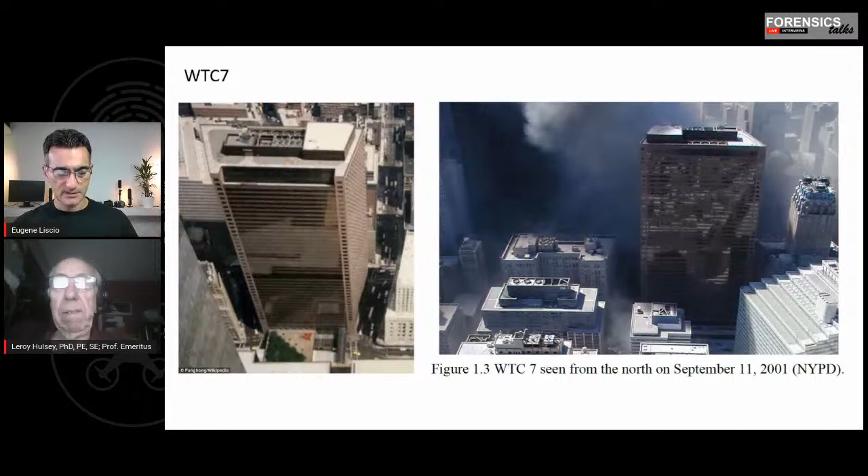I normally try to keep this conversational, but because of the content and the type of thing we're dealing with, it's very difficult to talk about all the components without giving some visuals. So let me go through this very quickly, and if I'm incorrect in anything, please correct me.

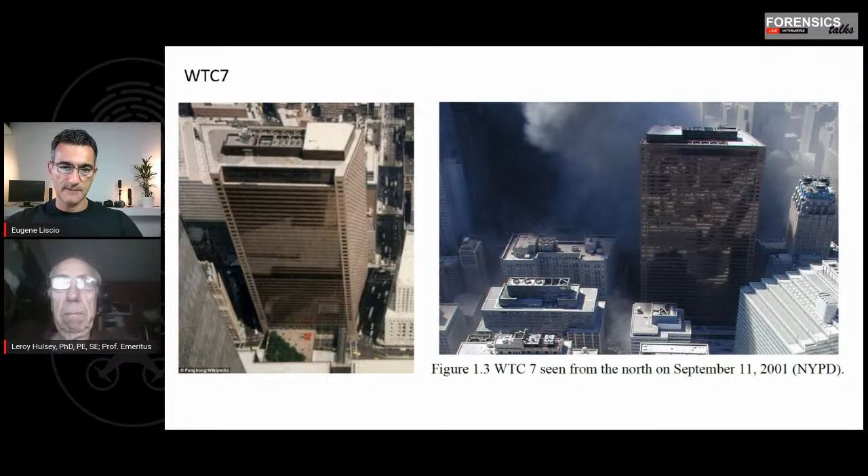World Trade Center 7 was a 47-story building completed in 1987. It was steel frame with reinforced concrete floor construction, built above the Consolidated Edison of New York Electric Power Substation, with its first 3 floors connected to the substation. Inside this ellipse here is where we have the original substation.

World Trade Center 7 is located about 105 meters north of World Trade Center 1. If you see my mouse, that's World Trade Center 7 there, and down here we have World Trade Center 1 and then World Trade Center 2. So World Trade Center 1 is actually the closer of the two tall buildings.

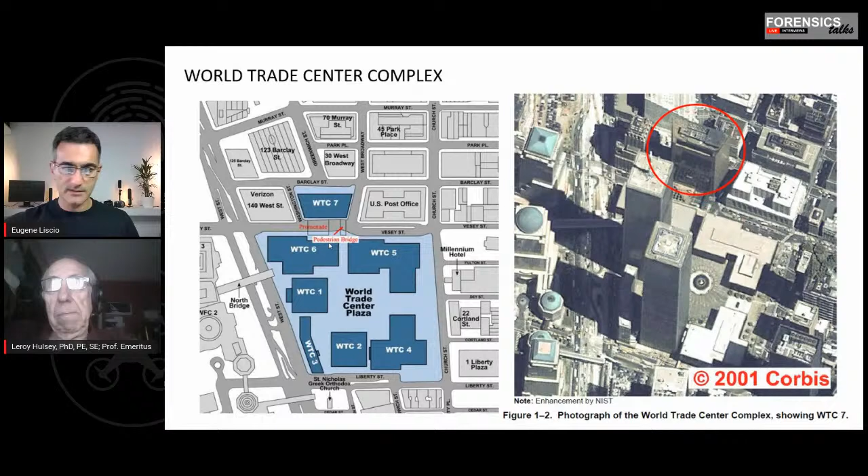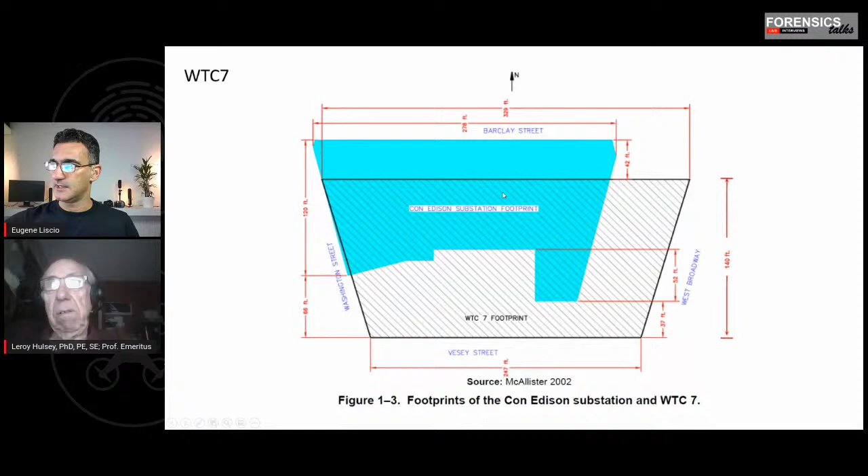Now World Trade Center 7 is not a symmetrical structure, so you can see it looks sort of like a trapezoid. If we look at a plan view here, you'll see one end, the north end, is wider than the south end. The north end is about 100 meters, and the south end is about 75. Shaded here is the outline of the Con Edison substation.

In terms of the timeline of events for that day: at 8:46, American Airlines Flight 11 crashes into the North Tower of the World Trade Center, hitting between the 93rd and 99th floors, killing all 92 people aboard. Then just after 9 a.m., United Airlines Flight 175 crashes into the South Tower between the 77th and 85th floors, killing about 65 people aboard.

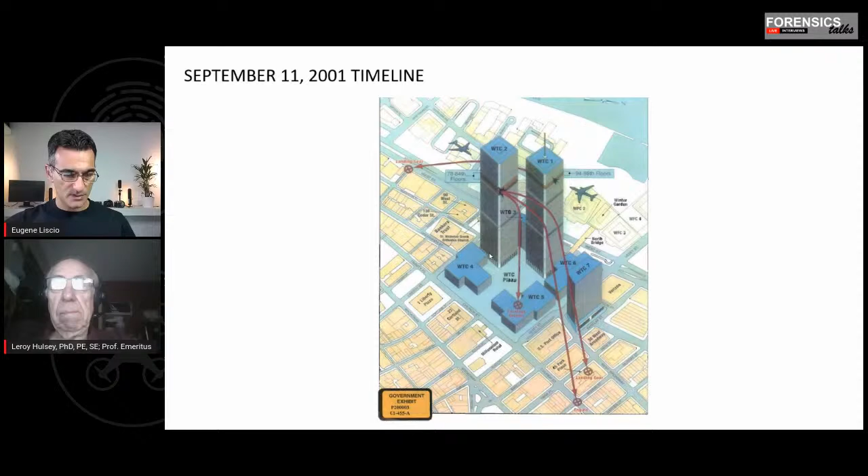At about 9:59, just before 10 a.m., the South Tower collapses. At 10:28, the North Tower collapses. The North Tower is the one that contributes to the damage of World Trade Center 7 — it's substantially damaged by debris when the North Tower collapsed, and the story is that the debris ignited fires.

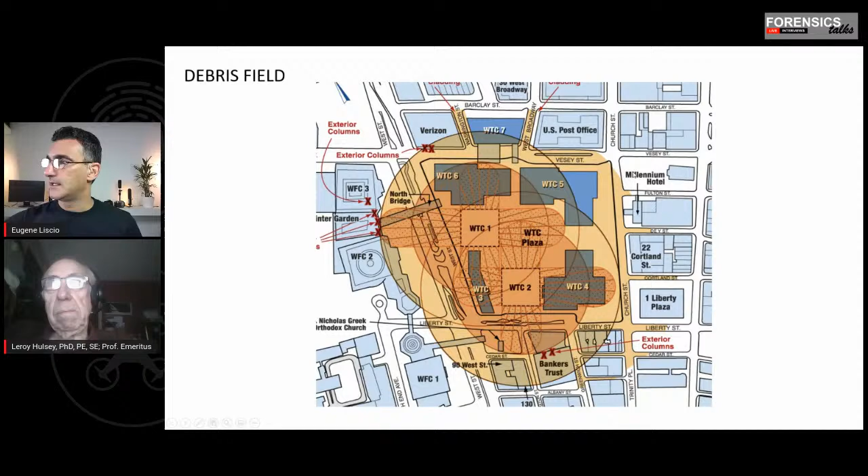What you're looking at here is a debris field outline, the largest circles being the extent to which much of the material was found. Right after this, you can see some of the damage that was mapped out — the red areas are really what we're looking at.

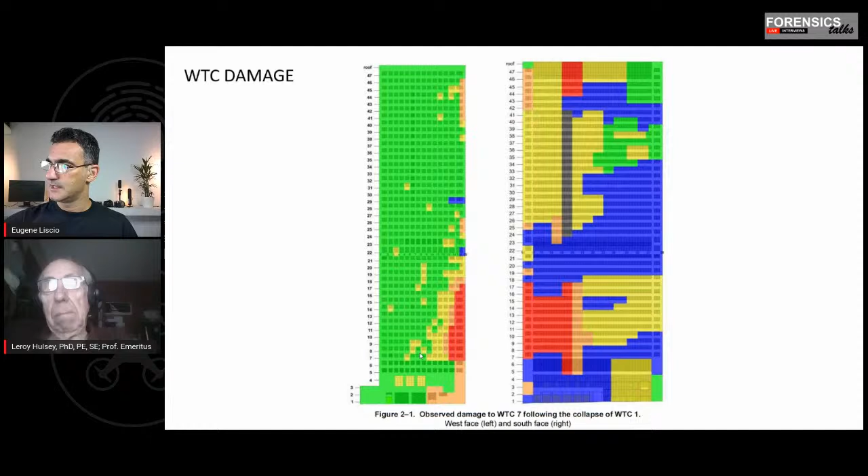The view on my right is the south face, the face closest to the North Tower. The small red section here is a view on the west side, and this corner is the southwest portion.

The building from the 7th floor to the 47th floor was supported by 24 interior columns and 58 perimeter columns. This was a building that had sprayed fire-resistant material, so it wasn't just a completely empty steel structure — there was obviously some protection. Now, as the story goes, the sprinkler system wasn't working.

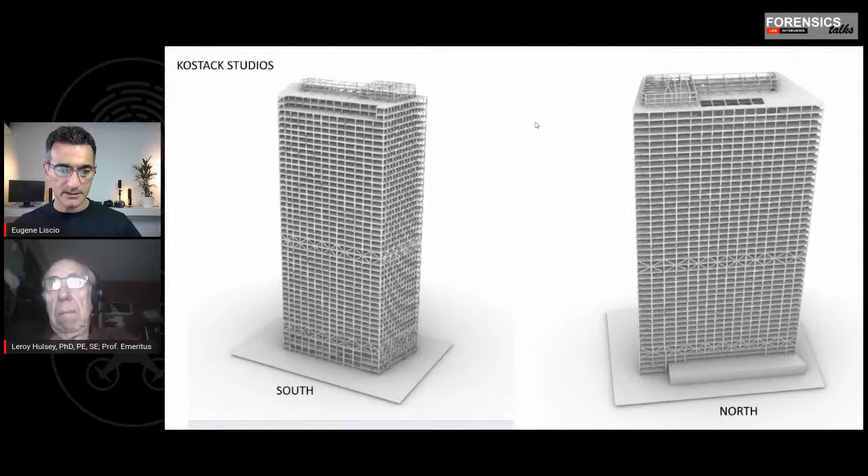In this building, you could see in the video before that there was some fire or smoke, but not what I'd call a substantial amount — the back end of the building was pretty much intact. But later in the day, I believe around 5 p.m. or so, the tower goes down. So that's kind of where we're at, and I'm sorry I'm going quickly here, but we have to focus in on some of the details of the report.

There were a number of different reports, and the basic story goes that the fires caused some expansion of these beams. This particular column here, column 79, is of particular importance — this is the critical beam that everybody has been really focusing on.

And the top end of my screen is the north end, so it's this northeast corner that's important. There's a number of beams that go across and attach to a girder, which attaches to column 79.

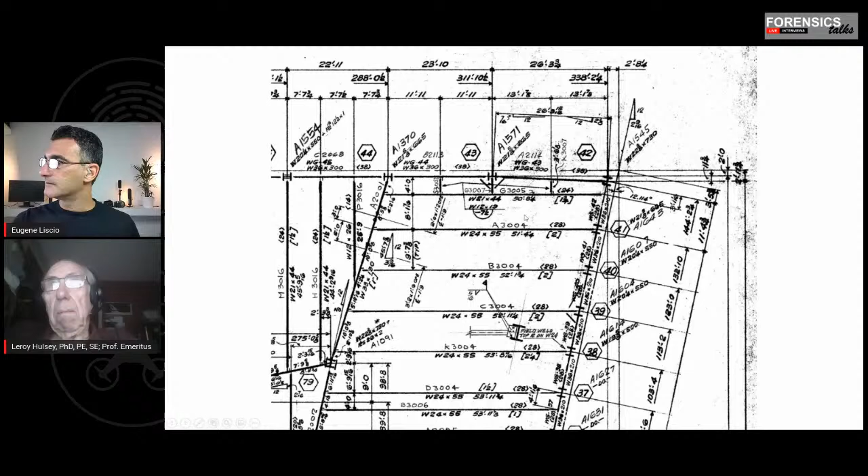And we have some design drawings and that sort of things. This is a schematic that I took out of Dr. Hulsey's report, and you can see here that there's some structure. So this column right here is 79, and then we have some beams and that sort of thing.

Okay, so I'm gonna stop there, and I have a question for you, Dr. Hulsey. First things first, the design of this particular building. When using a steel frame or a steel structure, what is the benefit, or why do you use a steel frame versus just building with concrete or whatever? What's the benefit?

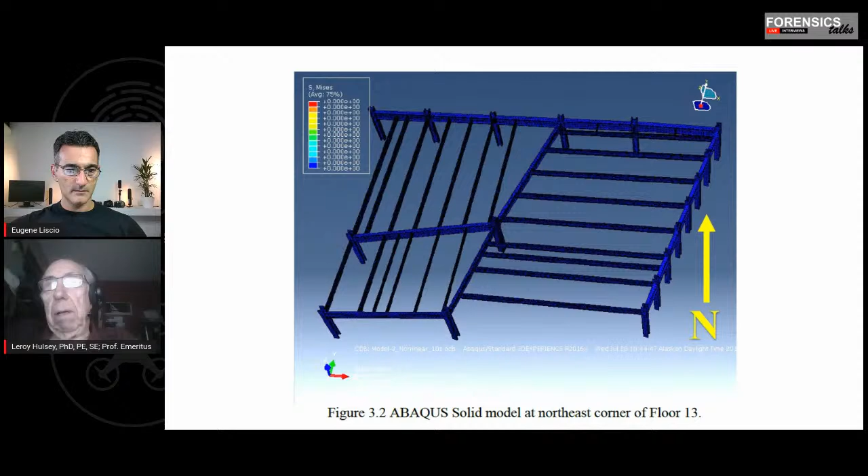Well, I think it's more about economics. Over the years, the concrete has been a preferential material over steel, and then a few years later, the steel industry gets more competitive, and then they become the preferential material to build buildings by. So you can even see a building start up architecturally as one kind of building and get changed before it gets to the construction stage, simply for those reasons. So there's a number of, and then there's preferences by people on what they would like to have and how they could make it work.

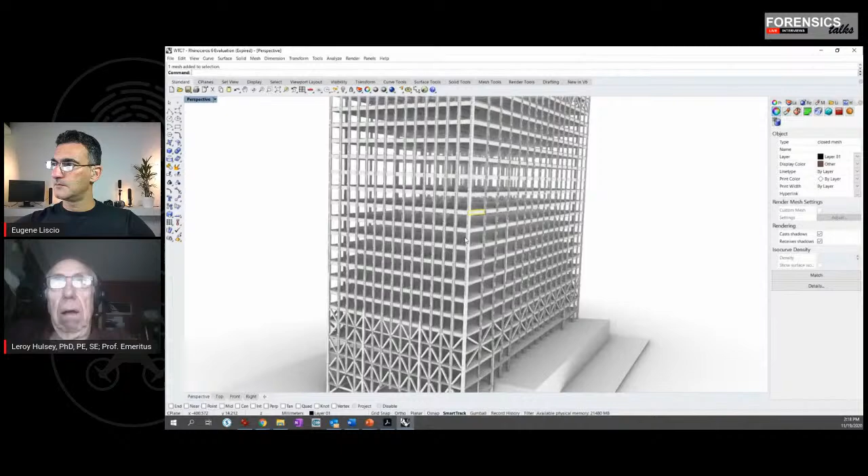Such as a concrete building can be architecturally very friendly, whereas a steel building has limitations. You've got an awful lot of, shall we say, a frame. You got a lot of shop work to do to get a shape that's other than straight, and so there's disadvantages if you want to go to highly irregular curvature kind of conditions to go steel. But something like this, where it's all straight sections for the most part, is probably a good choice to go steel.

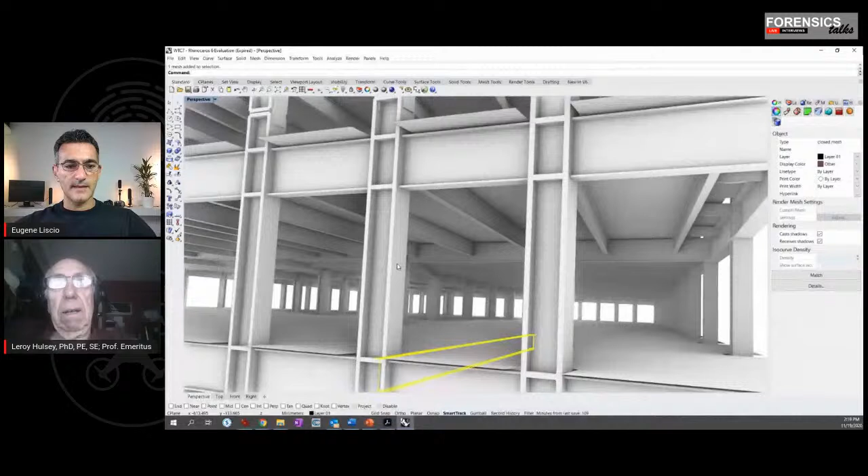I mean, is there anything here that raises any flags in your mind that says, hey, there's something designed poorly or something? I mean, it's built. They say it's built to code. I mean, the fact that it's an irregular shape, it's not rectangular, does that cause any concern?

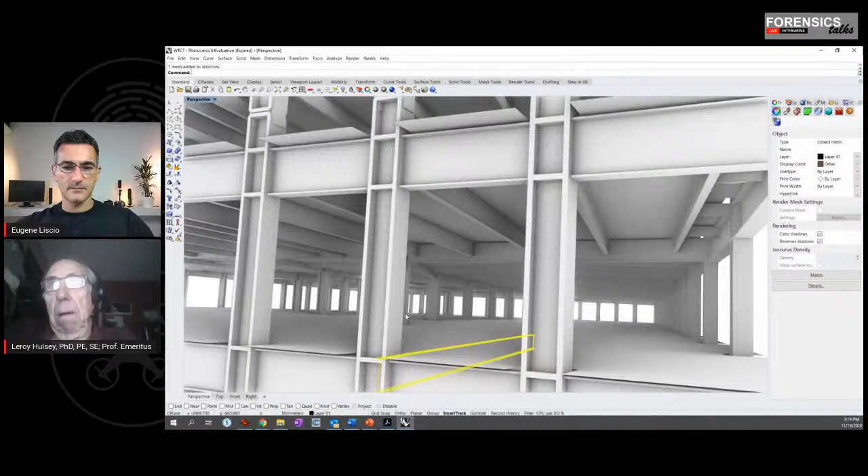Well, it causes complexity and load distribution. It tends to be. I felt like the design of this building was not the most desirable. I thought there was a lot of complexities in it that I didn't think it needed to be there. But in terms of code, I did not see anything in this building that flagged a code violation or flagged a situation that would make it be questionable in that regard.

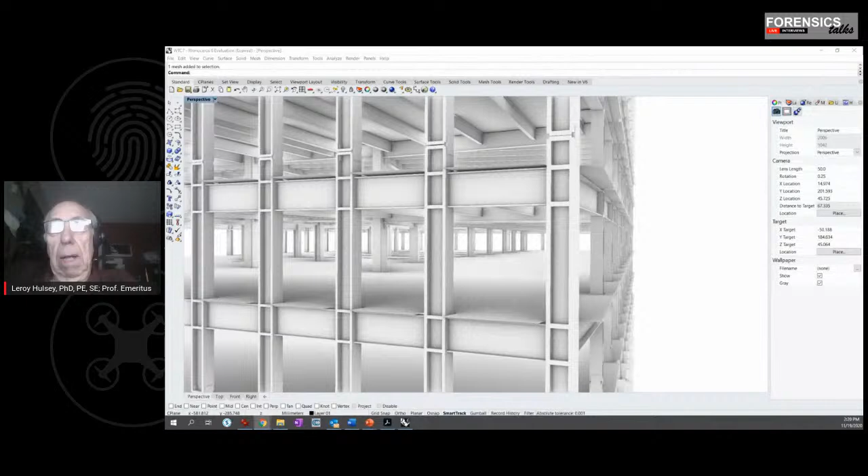Okay. So I don't know, do I have a minute just to share something with you? I would like to say that when I started this, I announced right away that fire did not bring this building down. And the first thing I looked at, I didn't look at what NIST did. I looked at how that building needed to behave. And it became very obvious very quickly that it was not what was being said. And so I put that out there, and that was before the end of the first year.

And then the other 3 years I was working on trying to figure out, trying to simulate NIST assumptions and seeing what they came up with, and then trying to evaluate the actual collapse, which was not an easy task. So anyway, that's kind of what I wanted to just share with you quickly.

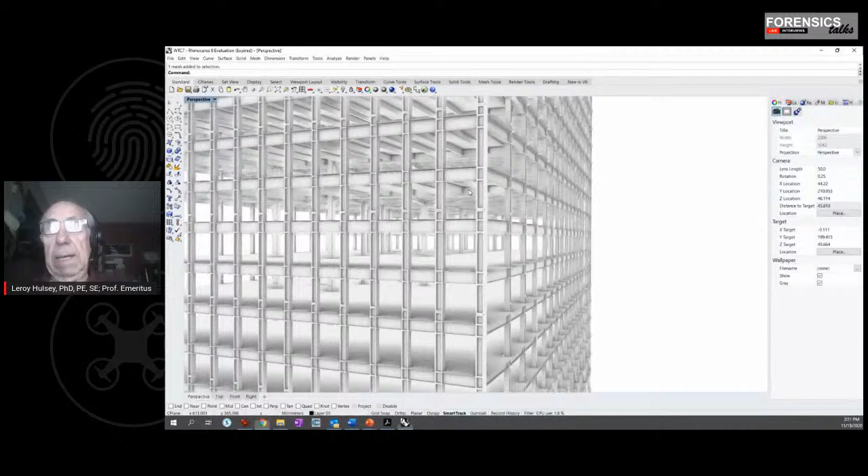The connections on this schematic is not actually what was used to build this structure with. I mean, geometrically, it's a good view.

Anyway, are you still there? Yeah, I'm here. I'm just listening.

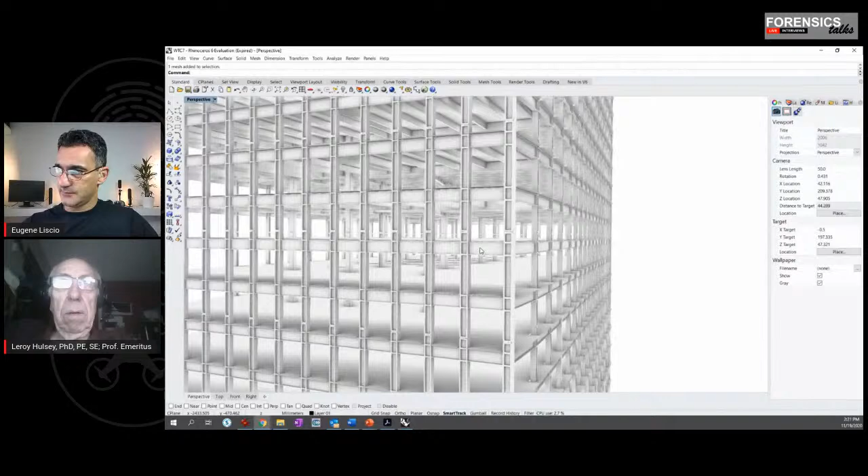What I'd like to do is just show people, we got to get people's head around this thing. What we're talking about is the corner here. This is the northeast corner, and then if we get inside, you'll see that there's a number of beams here, and so it's this column right here. So this would be column 79 that'd be failing, and the connection here is not correct.

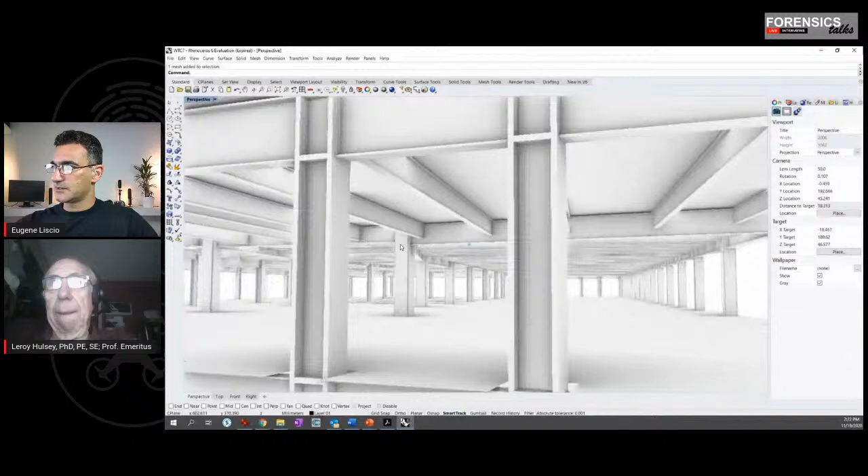This is just a model for visualization, or something that's demonstrative, so it's not fully accurate. But that particular connection looks more like this.

So Dr. Hulsey, can you tell me about the seated top clip connection? Yeah, if you take a look at the picture on your left, you'll see two things that are significant. The column, it looks like an H looking down on the top. And what they did is they came in and they put plates on and welded it to the outstanding legs on each side.

So, and those legs actually stood out from the edge of that H. And then they connected the A2001 girder, which is what if you'd bring your arrow down, that's it.

And you'll notice that there are stiffeners, web stiffeners right next to the edge. That's it right there. That web stiffener is significant because it stiffens that web and it stiffens the flange down at the bottom. You notice that stiffener is not all the way up. It's only at the bottom where that A2001 is actually sitting on a base plate.

And if thermally, what NIST said is that when this thing heated up, that the A2001 slid along the base plate and slid off of that support.

Well, first of all, they forgot to include the stiffener. That wasn't part of their analysis. Secondly, that outstanding leg sitting out there, it could not go past that anyway. In other words, to your left, right there, it sticks out past that flange, and so therefore it couldn't move any further. So if everything I did was wrong, it still couldn't have moved past that, and it wouldn't have fallen.

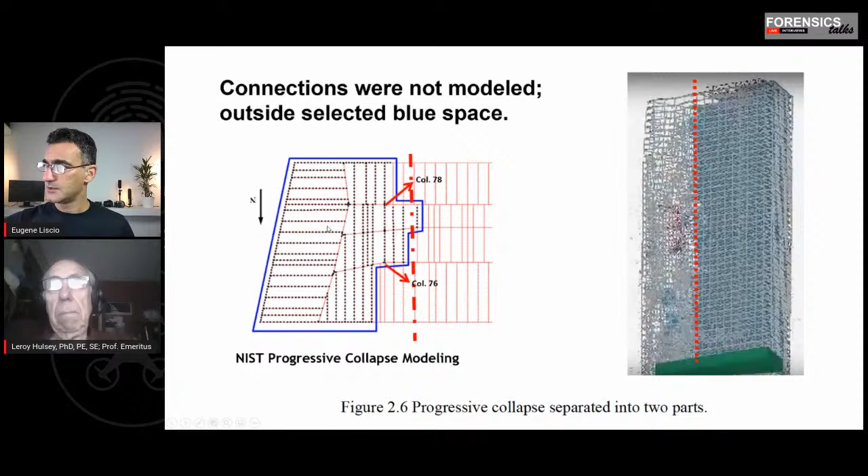What about the type of modeling that was used by NIST? So, for example, I saw that you had a very extensive model. Let me see if I got it here. So this here, what I have on my screen is the model that was produced by you and your team. What can you tell me about this model in terms of its accuracy?

I would say it's extremely accurate because what we did is we initially modeled it and we used what's called a coarse mesh, and then we kept refining the mesh. And when you don't see any changes to your results, or minimal changes to your results, you're converging in on a solution that you're looking for, and that's what I did.

Okay, and so if you'll notice, that green, that's just not a solid. That's a whole bunch of little pieces put together to create that shape. And so when we did all of that, we were getting really, really very, very good results in what we were looking for.

Okay, in terms of, I mean, you had mentioned fires and the fact that NIST is saying that there were fires on the building, and you can sort of read in the reports the progression of fires. They actually, and it appears that the south side is the part that actually gets struck, but the fires progress both clockwise and counterclockwise around the building over time. And it's interesting that it's the northeast corner that actually is the part that is that they're saying had failed first.

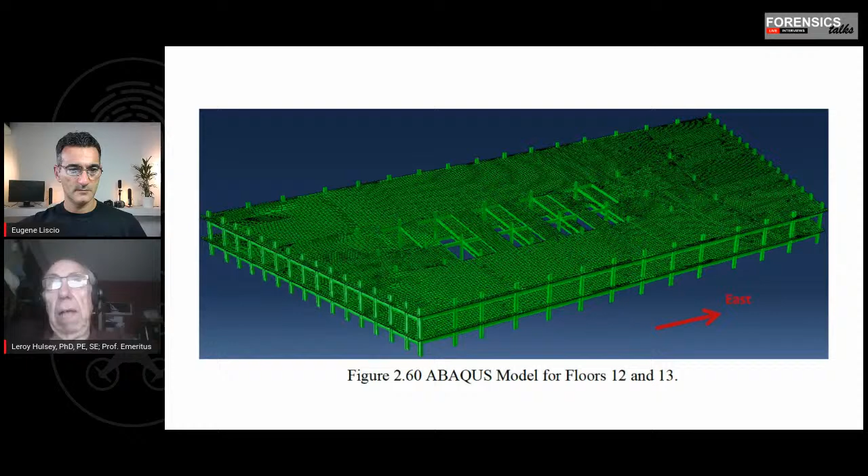When it starts going to larger temperatures, then you start getting a degradation of its capability to carry load and its capability to deform properly. So essentially we have a curve in our report that shows how it degrades with temperature, and so in this case, there were fires spread around, but the question I asked from day one is where was the fire combustibles at?

What produced it? Because most of these were financial operations or governmental operations, and they would have had everything in safes. I don't understand where all the fire combustibles were coming from, other than coming in from the building that fell down, the other World Trade Center buildings.

Right, so it's an interesting question. So these are just office fires, or whatever you have - people might have a printer, a desk, chairs, whatever other materials you're working on. That sure would be the source of what's burning.

So I guess the question is, in your models, did you use the retardant material, or did NIST use it, or is it not used? I did not use it.

And that's conservative because I wanted to see if we had the fire going in there, what conditions did we have to worry about.

On the floor, it's a concrete floor connected to these steel beams and girders, and of course NIST didn't account for the fact that there were shear connectors on it, but there actually were. So that made it stronger than they would have thought otherwise. But underneath that, it was a drop down ceiling, and that was a cavity.

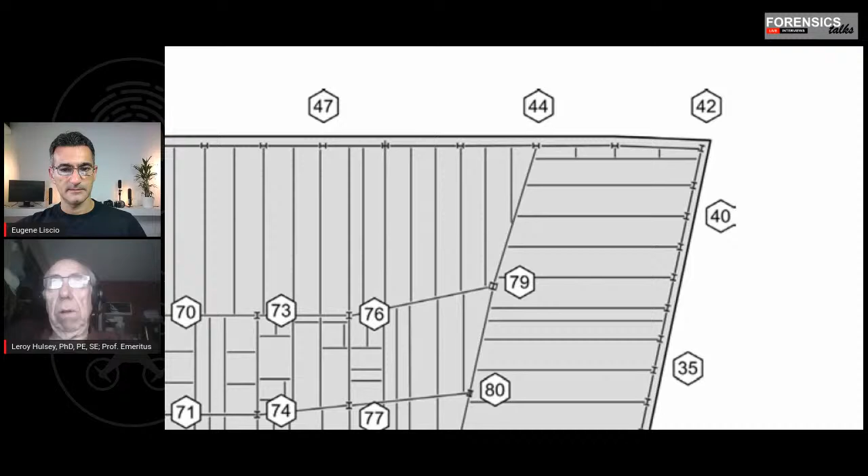Well, keep in mind that NIST looked at the exterior of the building to be fixed - in other words, couldn't move. And if you put your pointer up to number 40 on the exterior, that kind of gives you an idea of the east side, northeast side of this thing.

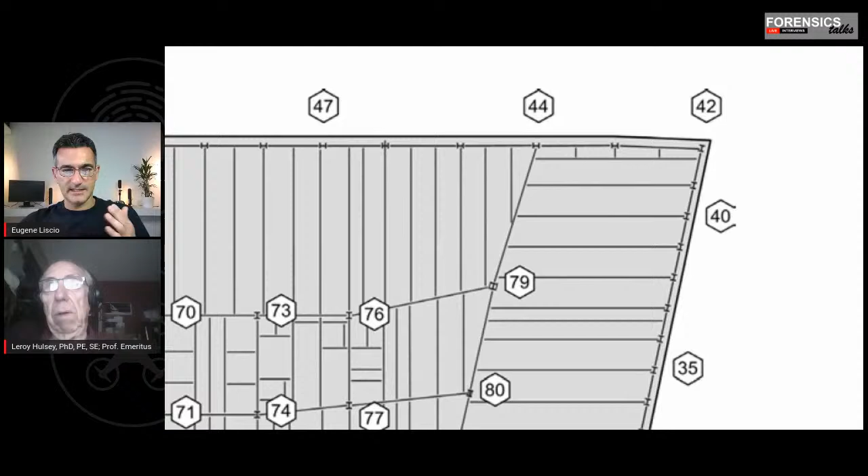And if it starts expanding, it's going to start moving with respect to that line 35-40, and all the movement then moves towards 79 and 44. So the assumption they're making, this boundary condition, is that the outside wall is not going to move, even though there's nothing on the other side to hold it back. Correct - they're suggesting that it's fixed rigidly and that everything is going to move to the west in our case.

That being said, there are beams through there, like at 79, but to the right of it - going from 79 over to the line 35-40, there's a beam going from column 79 left to right. You go upward, you get another one left to right, up another one left to right, and then at the very top near 44-42, you got one going from left to right, but there's members that are crossing, coming down and fastening to it to give it buckling resistance, and it's framed into the exterior wall system.

Okay, so all of those heated up. And that one up there buckled per NIST, but if they put those little beams in there, which they didn't, it wasn't going to buckle. And so all of that stuff affected what was going to happen on girder A2001, which was framing from 79 to 44.

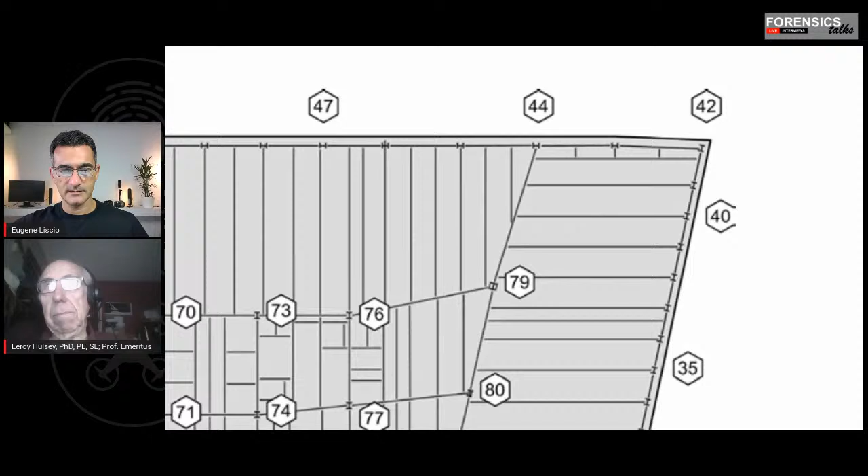Now, did NIST assume that there was no fire retardant material as well? I'm pretty sure that that's the case - I'd have to go back and review that again. But we did look at it the same way that they did.

I wanted to give it the benefit of the doubt so that there would not be any questions about whether we may have biased it. The only thing you can do in a case like this is look at the maximum and the minimum, and see where you are within it - you want to make sure that you haven't described something that's not even remotely possible.

Well, I guess my question was going to be: is there some kind of reason for fixing the outer wall, a beam? I have no idea. It's not fixed - no, it's not, it's flexible. Yeah, well, that makes sense to me.

So the very first thing, less than a year in, I said, wait a minute, this thing is actually not moving to the west - it's moving to the east.

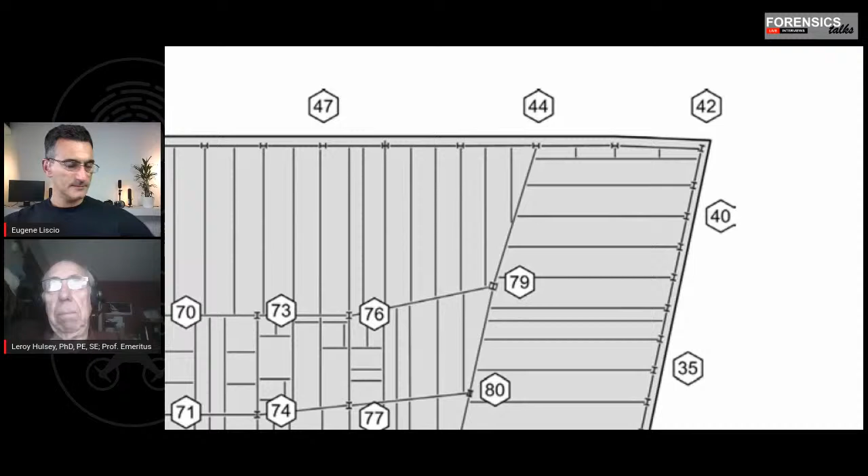So interesting, if you really stop and look at the thermal expansion of this floor system, the stiffest area within that floor system thermally is near the elevator shafts. So the movement, if you heat up this floor, it's going to be somewhere near those elevator shafts, and it's going to move in all directions with respect to that point.

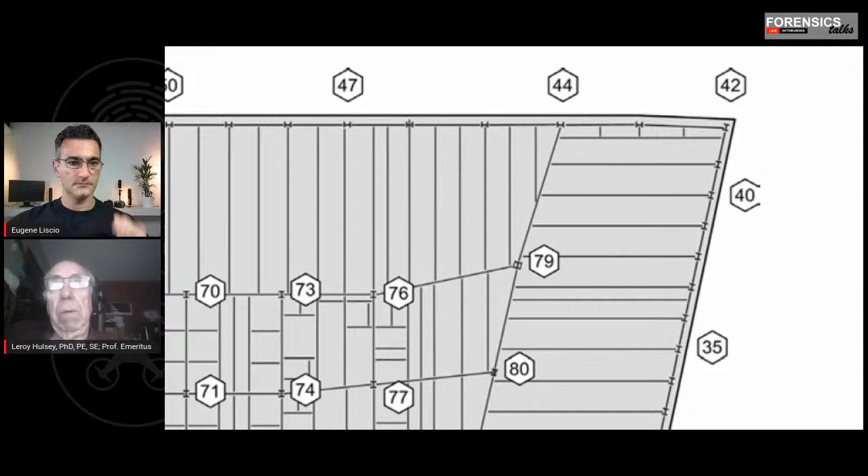So the relative movement actually at column 79 was not anywhere close to what they said it was between the column and the girder. Interesting.

So just to be clear for the people listening, what NIST is suggesting is that this outer wall is fixed. These beams start to expand, and they've left them free to expand. There's none of these smaller beams connecting this one, and this girder crosses past the column, and even though the column design we just discussed has some overlapping points which would block the girder from passing, they still had made it.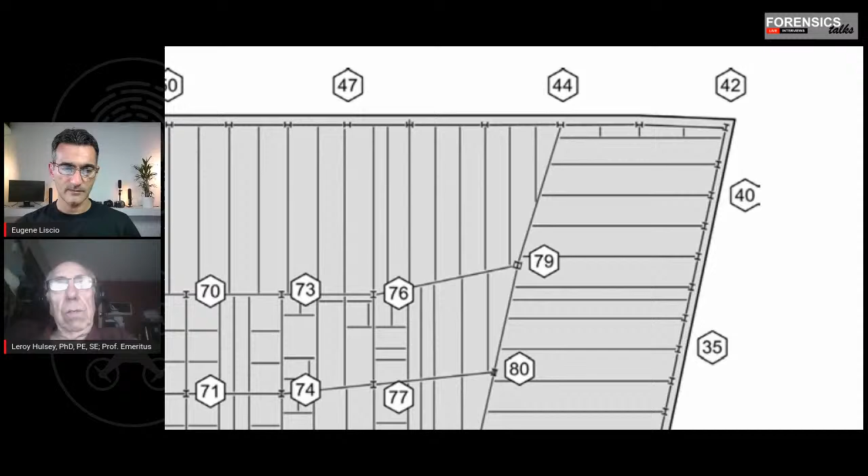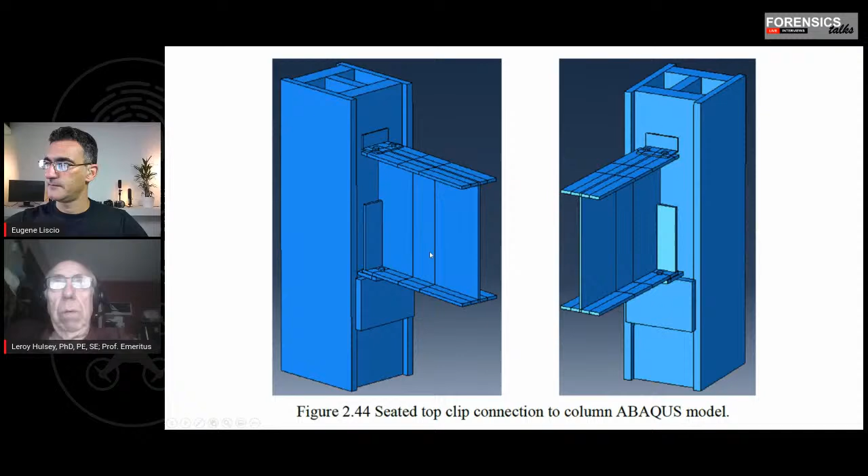Now there was a change to their report, can you tell me about the difference? So there's like 5.5 inches versus 6.25. Can you explain what happened there? Well, that bearing plate is 11 inches wide, and they came back with 5.5 inches as their relative movement between A2001 and that girder and column 79. Then they discovered, I don't know what their purpose was, but they came back and said it's got to be 6.25 inches of movement, which would have shoved it off, if there weren't any restrictions.

Well, if it was free to move and you just basically disassembled everything, or got rid of certain things.

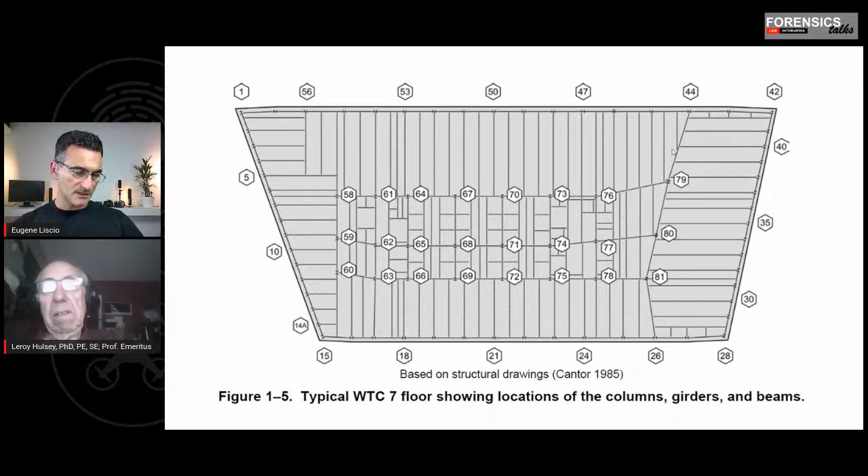In another report, there was a difference, and I don't remember if it's the Nordenson report. There were four reports. There was FEMA, the Federal Emergency Management Agency, issued in May 2002. There was NIST, in November 2008. There was also some litigation going over this particular building, with a company called Arup and Partners, and Guy Nordenson, so it's the Nordenson report, issued in April 2010. Then there was another one, the defense's Weidlinger Associates, and they came up with their own theory as to what happened.

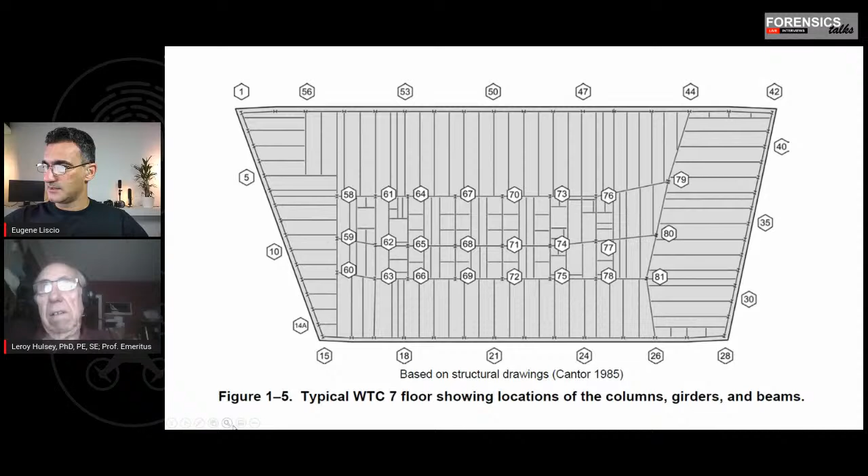But it's interesting that in the Nordenson report, they're suggesting the opposite happens. So if we go back to our model here, what we were talking about in this figure, what they're suggesting is that these beams are sagging, due to a load coming down on them, and we examined that.

The other thing, they didn't give any credit to the fact that the concrete and the steel was working together, giving a huge amount of stiffness there. But the point load that they put on it was not an accurate point load. It was a dynamic load that was spread over an area, and so the amount of load actually being imposed, we don't agree with what they had in that respect.

So I'm bothered by the fact that not a lot of credit was given to the concrete floor system by any of these people. In reality, that floor system was pretty significant, and I looked at it thermally as well as just structurally.

And when you say that, what you have, if I understand it correctly, you've got some metal plate sheeting, it's sort of corrugated I guess you'd call it, and then there's concrete poured into that, and they're fastened, there's studs that hold the two together, like rebar almost. Well, there's reinforcing bars in the concrete, but there's also what's called shear studs, which is like bolts that are welded into the flanges of those girders and beams.

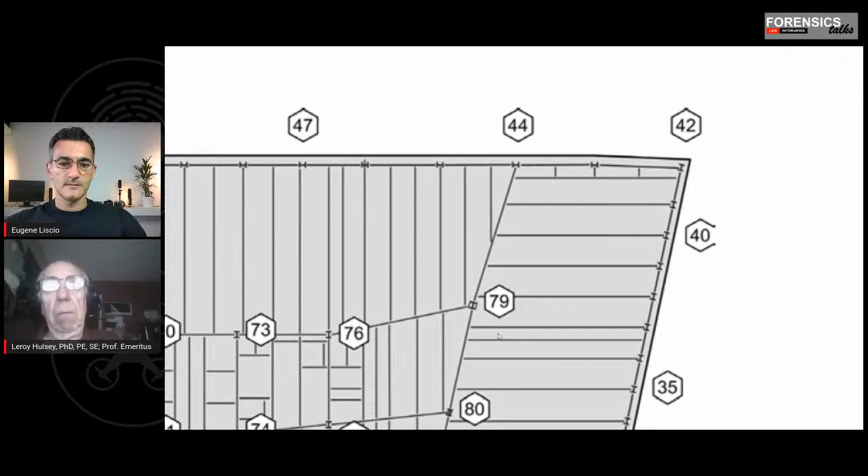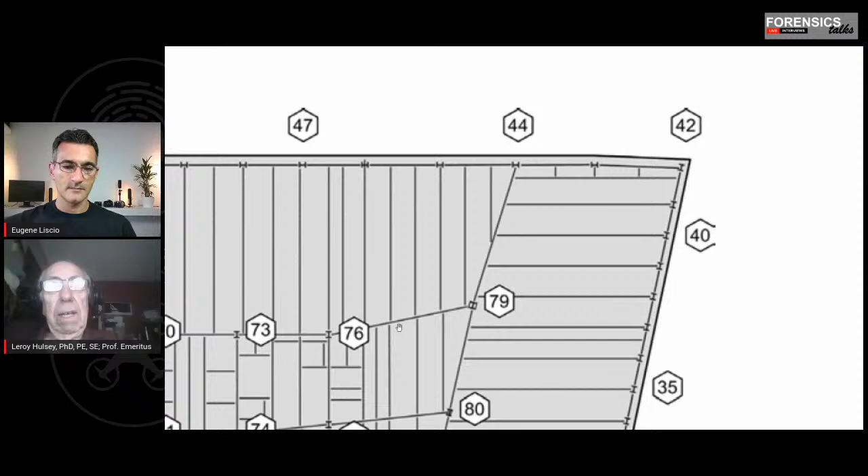And so you've got that issue going on. The thermal expansion, or the thermal properties, are quite different between the two, and it's a function of the aggregate that goes in there. So, okay, anyway, we looked at all that.

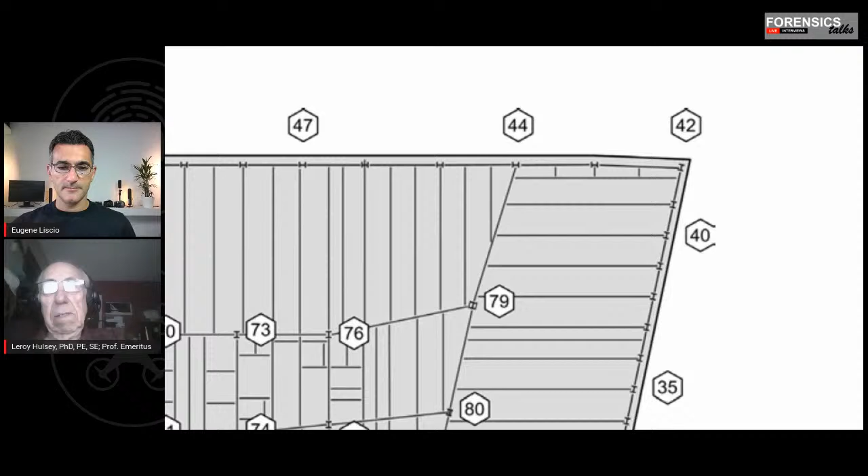So let's say, hypothetically, that for whatever reason the connection at column 79 is free to move, and we get this girder that falls off of its support. When I think of the steel structure, I see this lattice, all these interconnected beams, so if you remove one connection, I can't imagine everything just progressively collapsing. Is it possible for that girder to fall off and then successively cause a ripple effect where the next column fails, the next column fails, the next beam fails, and so forth?

Well, you can certainly simulate that, but the problem is this building is not symmetrical. So if you start playing that little game, it's going to tilt. It's not going to come down as the video shows you. So that whole scenario is not something that could have happened. There are so many reasons why it couldn't have happened.

So that's just another thing. We looked at interior columns coming out, we looked at exterior columns coming out, in various stages, and almost every scenario resulted in a tilt. So what we ultimately did is we started saying, what could have happened to create what we see? It became very clear that we had to take out all the interior columns and the exterior columns slightly after that point in time, and that would have enabled it to come straight down.

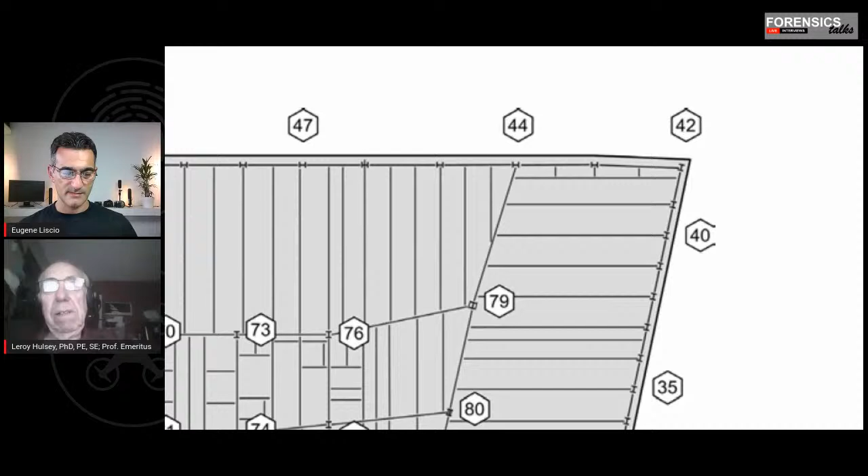That's interesting. Now, the Weidlinger Associates report actually says that this beam will come down, but there were also other floors coming down. But the temperatures they were using were twice what they're saying, something up in the range of 800 degrees Celsius on these other floors. But I guess the question is, what's the source of fuel at that point to cause that? And where were most of the fires anyway? They were on the 12th floor, certainly below floor 13.

So also to clarify, when you talk about this progressive collapse, or the modeling that you did in order to simulate what we see in the video, are you literally cutting the connections at all the beams? Or how are you modeling that?

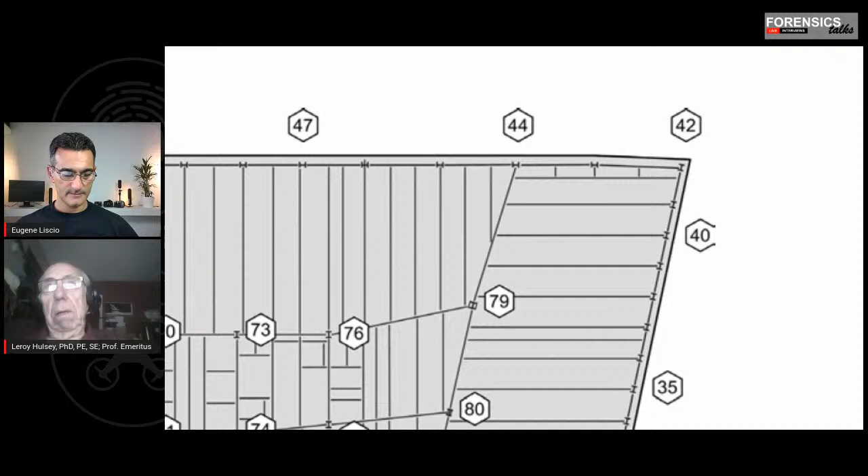Well, over 8 stories, we cut the columns directly off so that they couldn't provide lateral support, or they couldn't provide axial support. That enabled them to move down as a unit, enough to move the whole thing down. I think if I recall correctly, it was at least 8 stories that we had to do that to make it happen.

And then the exterior slightly after that. But in reality, that column 79 up there actually had to come down at the top, between floor 45 and 47, supporting the penthouse up there, the penthouse.